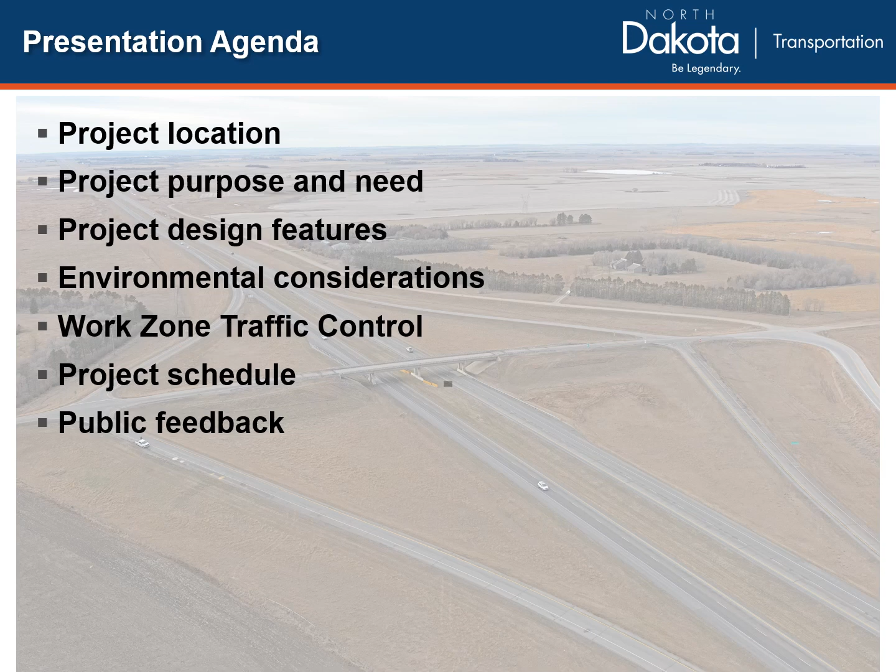This presentation will include discussion on the following topics: project location, project purpose and need, design features, environmental considerations, work zone traffic control, project schedule, and public feedback. The goal of this presentation is to solicit input from property owners, businesses, residents, and the traveling public, and answer any questions. Public outreach for this event includes postcard mailers to property and business owners. Public comments received will be included in the decision-making and incorporated into the environmental document.

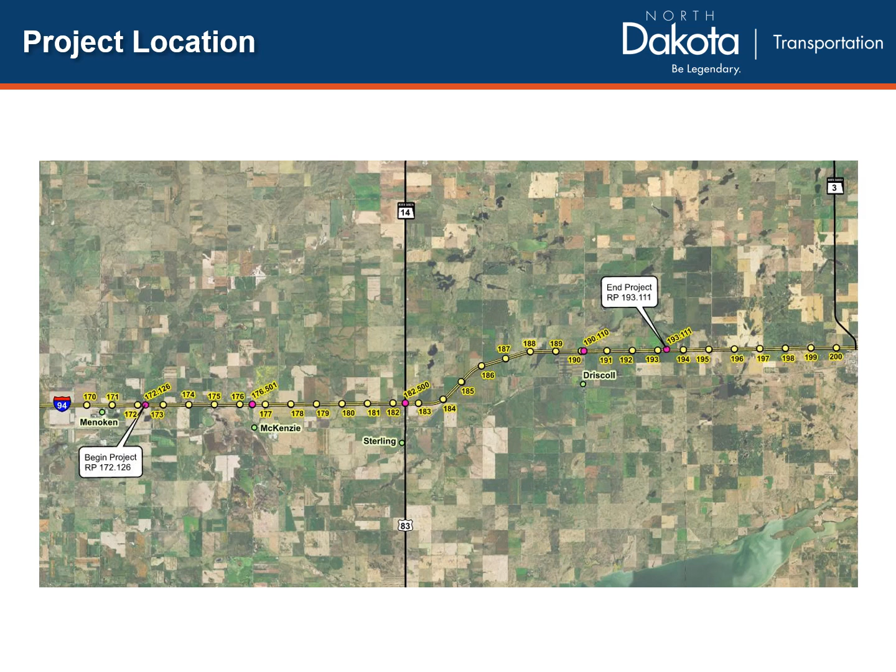The project is located along Interstate 94 from just east of the Menoken interchange to the Burleigh-Kidder County line. The project is split into 4 separate segments: Menoken to Sterling, eastbound and westbound, and Sterling to Burleigh County line, eastbound and westbound. The project purpose is to reconstruct the roadway, reestablishing the structural integrity of the pavement section. The corridor was originally constructed in 1966 with continuously reinforced concrete and is prone to blowouts during the summer months. The roadway requires regular maintenance, including hot mix asphalt overlays and concrete pavement repairs. Maintenance efforts will continue to increase as the pavement ages.

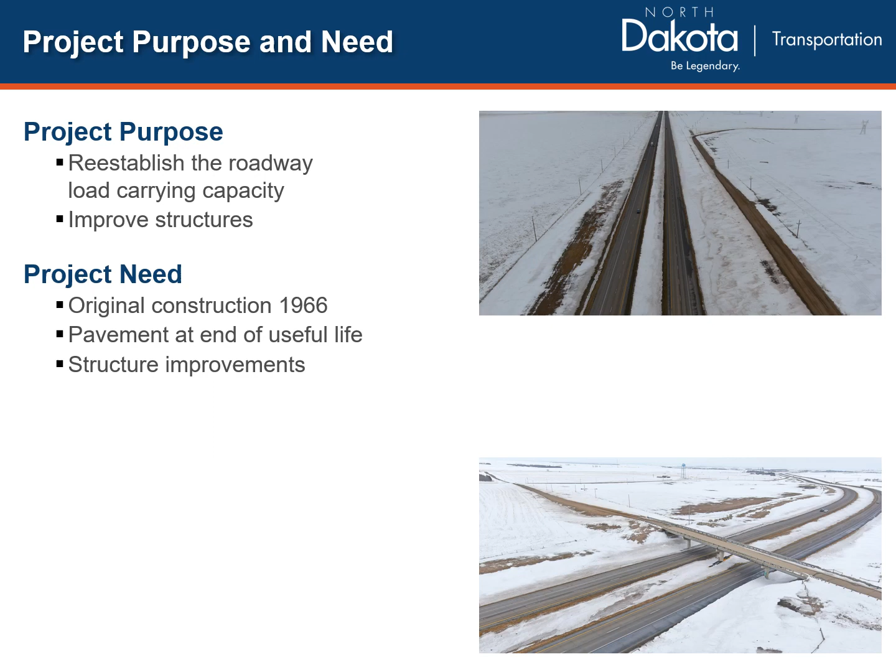The roadway requires regular maintenance, including hot mix asphalt overlays and concrete pavement repairs. Maintenance efforts will continue to increase in frequency and significance as the pavement ages. The National Environmental Policy Act, NEPA, requires agencies to assess the environmental impacts of proposed actions prior to making decisions. NDDOT uses the NEPA process to evaluate the environmental and related social and economic effects of their proposed actions.

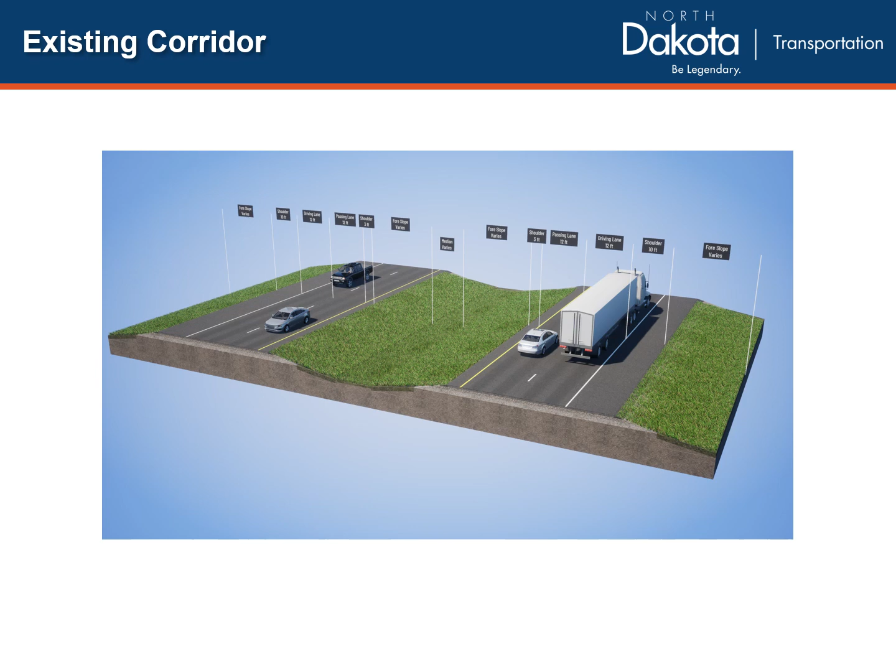The existing corridor consists of 2 eastbound lanes, 2 westbound lanes with a 3-foot inside shoulder and a 10-foot outside shoulder. The current traffic volumes along the corridor are 4,000 vehicles per day eastbound and vary from 4,000 to 5,000 vehicles per day westbound, the higher traffic being west of US 83. The proposed roadway would consist of a similar geometric layout as the existing, with a wider 4-foot inside shoulder and the outside 10-foot shoulder consisting of 2 feet of concrete and 8 feet of hot bituminous pavement. High-tension cable guardrail will be placed in the median throughout the project limits.

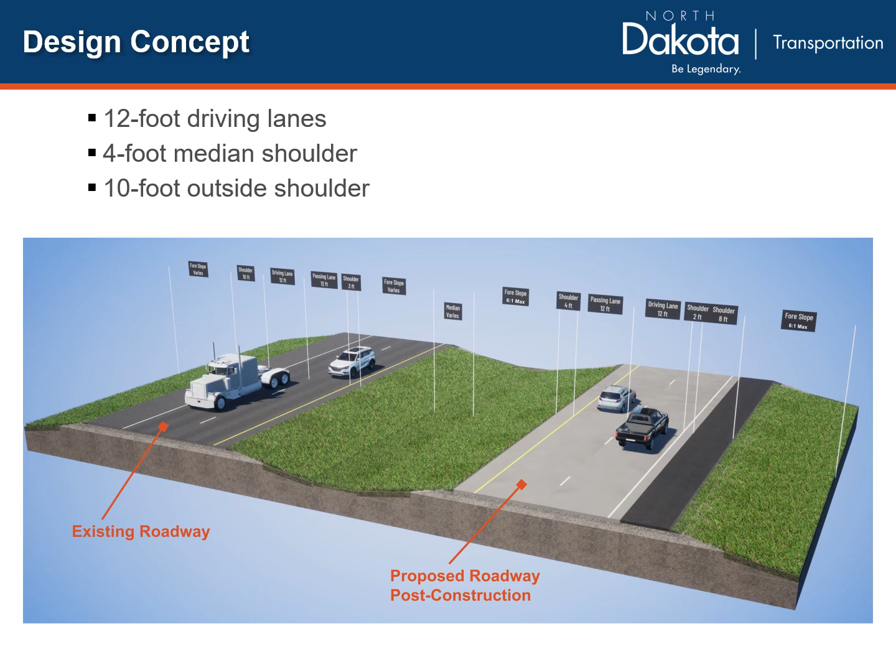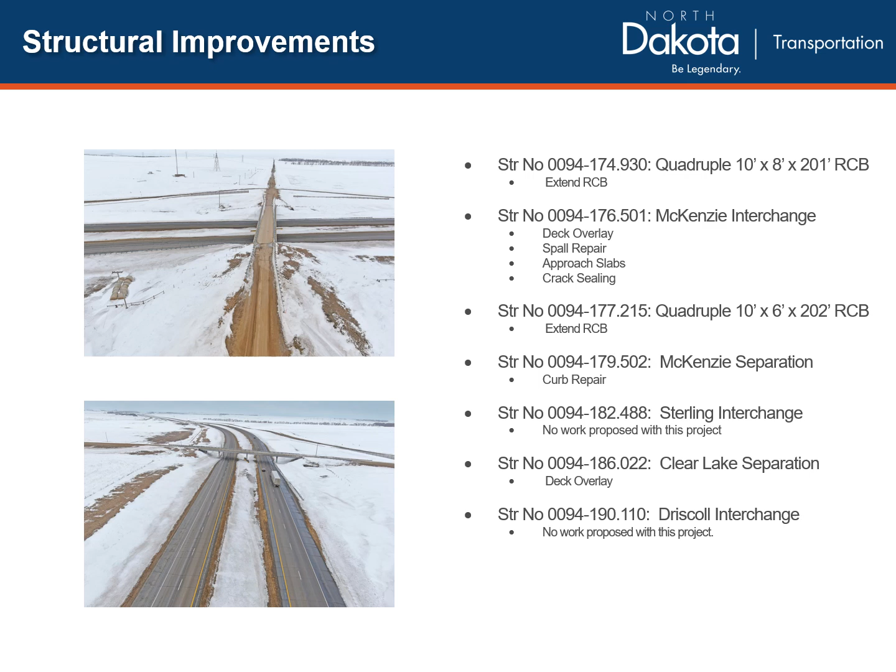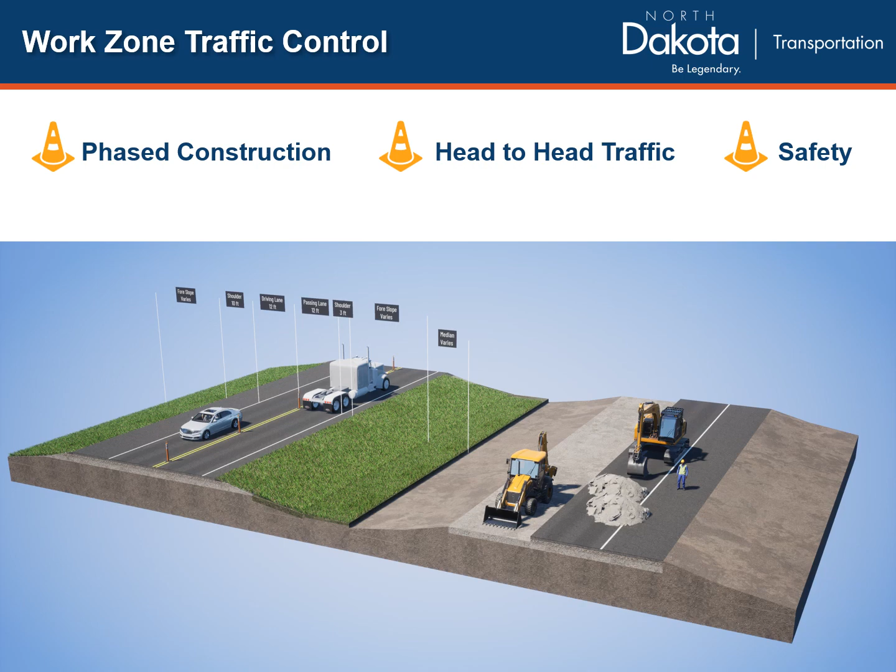There are 7 structures within the project limits, including 2 reinforced concrete boxes, 3 interchanges, and 2 grade separation crossings. Improvements at the structures include extending the box culverts, deck overlays, and approach slab replacement. No work at the Sterling interchange is proposed as part of this project. Traffic will be head-to-head on the roadway not under construction, providing 1 lane of traffic in each direction during construction. Access to and from the interstate will be maintained by installing temporary ramp connections at existing interchanges. Traffic delays can be expected in the construction work zones. The bridge deck overlay at the Clear Lake separation will require the overpass to be closed due to the narrow bridge width. Crossroad traffic will need to use alternate routes during construction.

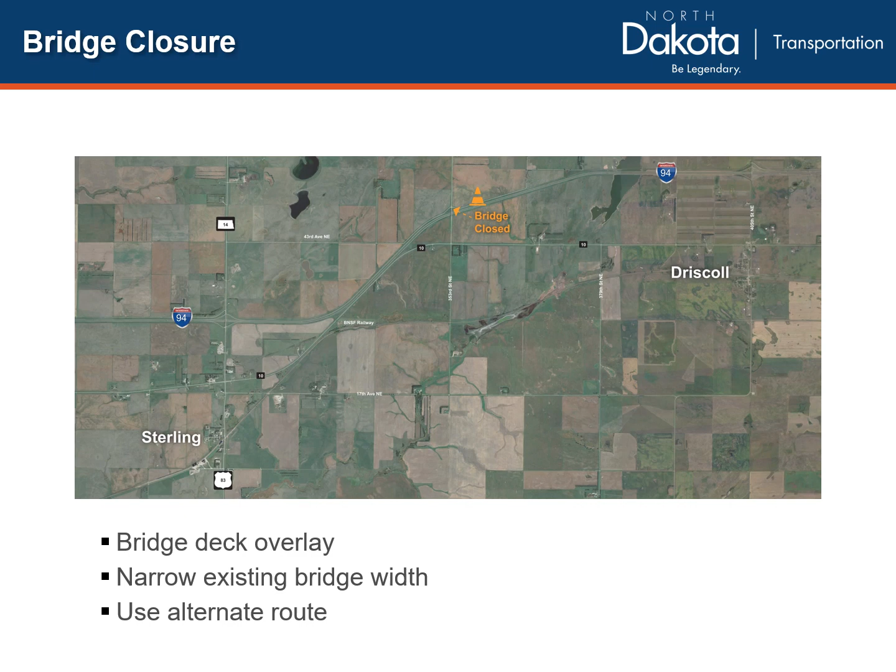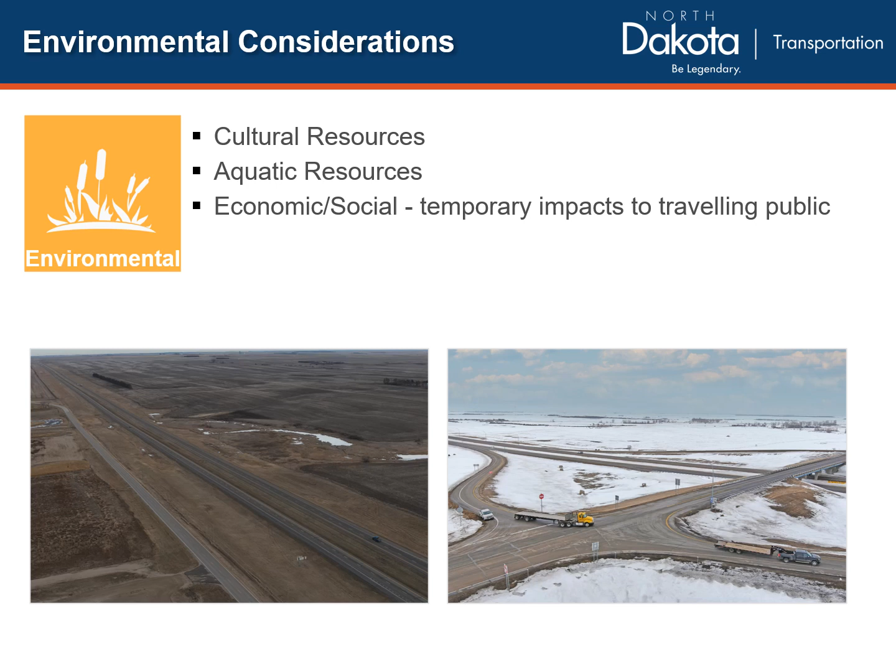The environmental considerations for the project include cultural resources, aquatic resources, including wetlands and streams, and economic and social impacts. No Section 4(f) facilities exist within the project limits. The project is not adding any additional through lanes and has no significant alterations to the horizontal and vertical alignment. Therefore, a noise analysis will not be required. The existing right-of-way is approximately 200 feet north and south of the median center line throughout the corridor. No work is anticipated outside of the existing right-of-way.

There are two alternatives being considered as part of this project. These include the no-build and reconstruction alternatives. There is no initial cost for the no-build alternative, but ongoing maintenance costs will continue. The reconstruction alternative has an estimated construction cost of approximately $146.5 million. Both alternatives have pros and cons. The no-build alternative pros include no initial costs and no initial impact to traffic. Cons to the no-build alternative include continued maintenance costs, ride quality continues to deteriorate, impacting traffic, and the structures will continue to deteriorate. The build or reconstruction alternative pros include improved ride quality, increased load carrying capacity, reduction in maintenance, and increased lifespan of structures. Cons to the reconstruction alternative include traffic impacts during construction and cost.

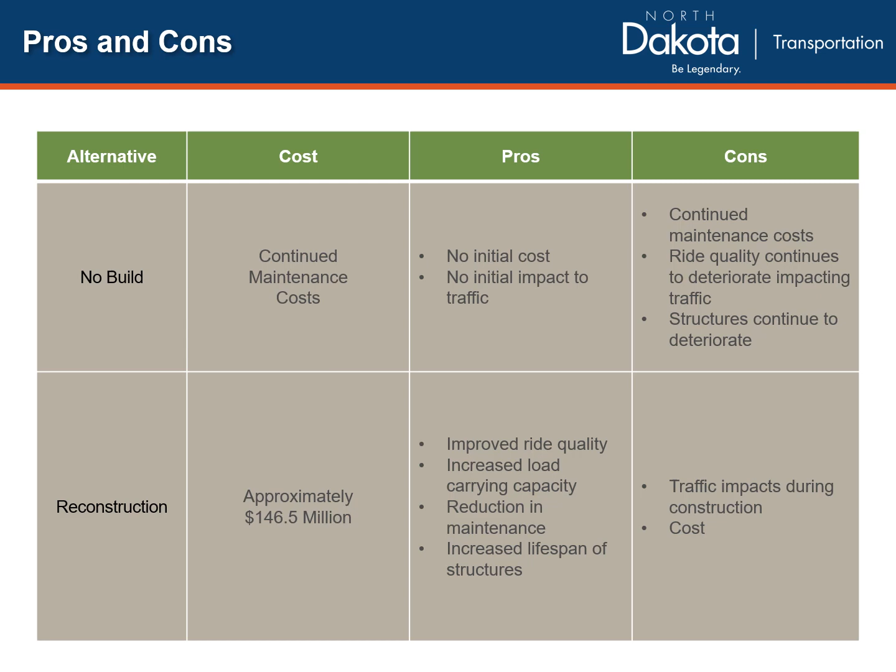This concludes the public input meeting presentation for the Interstate 94 reconstruction project from east of Menoken to the Burleigh County line. Please participate in the response activities and discuss with the project team. Written statements about the project may be submitted for 15 calendar days following the public meeting, May 22nd, 2024, and will be made part of the public record. Again, on behalf of the North Dakota Department of Transportation and Houston Engineering, we thank you for attending this presentation.